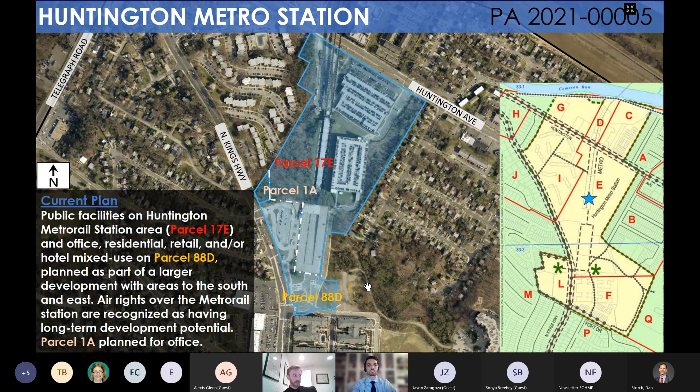And so that, as well as the south garage closing, has compelled a new look at the comprehensive plan for this specific study.

The Board of Supervisors authorized a plan amendment to look at the entirety of the Huntington Metrorail site and that adjacent parcel as a new planning study area, and asked staff to consider a maximum floor area ratio of 1.5 FAR, which is about 1.8 million square feet of primarily residential development. I'll explain in further detail exactly what that land use mix is that we've been looking at.

In any case, some of the development is anticipated to occur south of the station along North Kings Highway, and then some of it is anticipated to occur at a later phase on the Huntington Avenue frontage once that north garage reaches the end of its useful life.

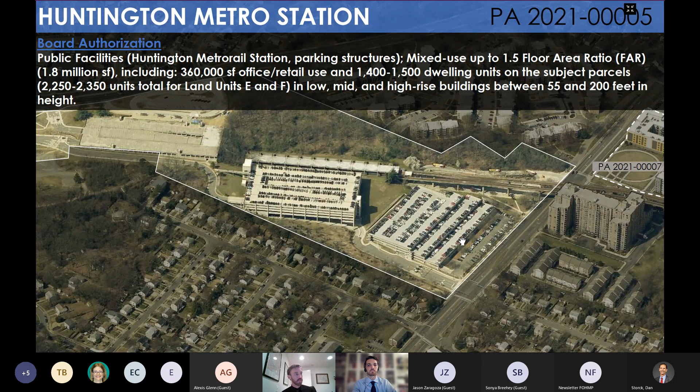So this is what we call the quantification of the plan amendment, looking at the total increase in development intensity and density associated with the plan amendment. In a nutshell, the net increase being requested with this planning study is up to a maximum of 1,500 net new multifamily units over the current plan recommendation. Additionally, 86,000 additional square feet of new office potential and 9,000 square feet of retail potential. These uses would be provided in low, mid, and high-rise building types between 55 feet and 200 feet. That's the maximum density scenario.

One of the things we'll say is when we do our impacts analysis across systems—transportation, environment, schools, parks, public facilities—that's what we study: this maximum scenario, to try to understand the potential impacts of a development of this scale.

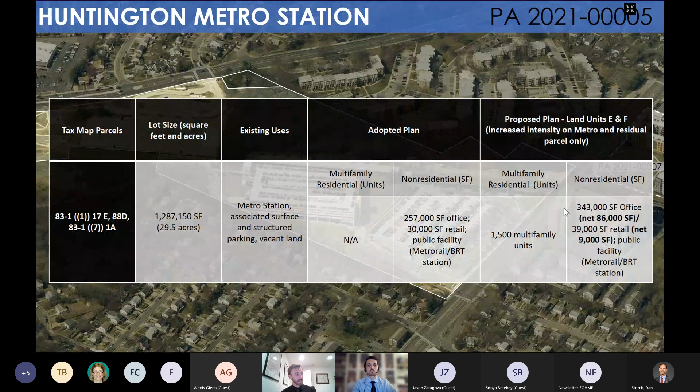I'll save the meat of the plan amendment, since the primary focus of this meeting is the active transportation planning effort. But if you're interested in the planning study underway, the task force that Supervisor Storck had take a look at this, known as the SSPA task force, produced recommendations on the planning study on July 11th.

Some of those recommendations resulted from this active transportation planning effort. As I mentioned, we've been able to front-load some of those recommendations into that task force draft as they relate to the frontages in particular.

So I'll give it away now: the plan amendment recommended by the task force includes a 10-foot wide shared use path with a minimum 8-foot wide landscape amenity panel with street trees along the North Kings Highway frontage, to accommodate pedestrians and cyclists of all ages and abilities. In addition, on the Huntington Avenue frontage there would be improved bicycle and pedestrian facilities with streetscape, which could be accomplished including through repurposing existing right-of-way inside the curb, such as the right turn lane along the site frontage.

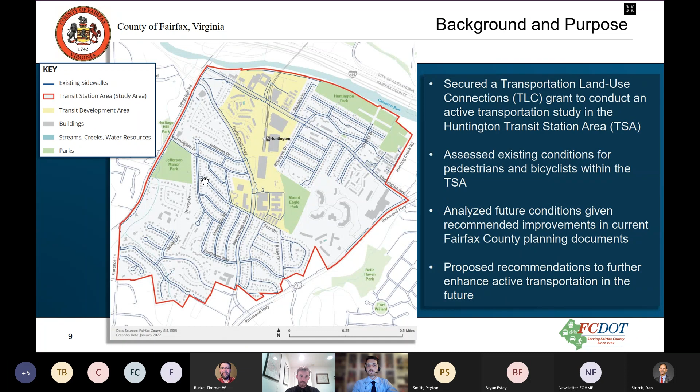So a bit more about the Transportation Planning Board, which is really the folks that organize and administer this grant. They're housed at the Metropolitan Washington Council of Governments, also known as COG. They've been administering this grant since 2007, and they've done 167 planning projects throughout the region, a really helpful way of coordinating transportation and land use connectivity in these focus areas where we're seeing transit-oriented development.

As part of this project, a consultant team was selected. Fehr & Peers was the lead project consultant, and they have a lot of experience. The county's worked with them in the past on similar projects focused on active transportation, and done a lot of work in metro stations around the region, as well as a subcontractor, Rhodeside and Harwell, who assisted with data collection and review of planning documents. And of course we had Fairfax County Department of Transportation staff, as well as the planning department and other departments that helped flesh this report out and made this study worthwhile.

So how is this different from other transportation studies? If you're familiar with the plan amendment study, for example, or any other transportation studies throughout the county, a lot of the metrics are focused on how we can improve traffic, vehicular traffic, how we can improve delay, how we can improve level of service for vehicles. So really we wanted to focus on metrics that would look at how we improve comfort, safety, and access for pedestrians and cyclists.

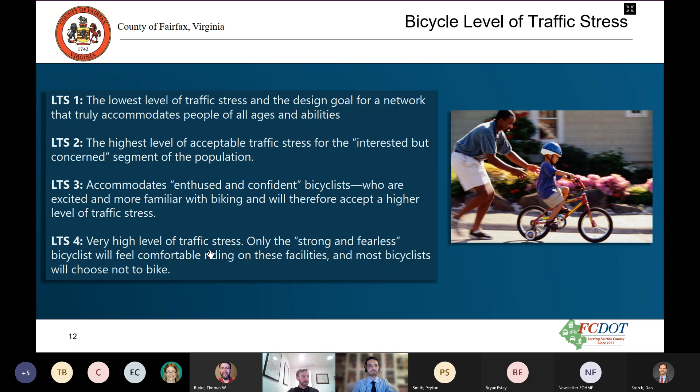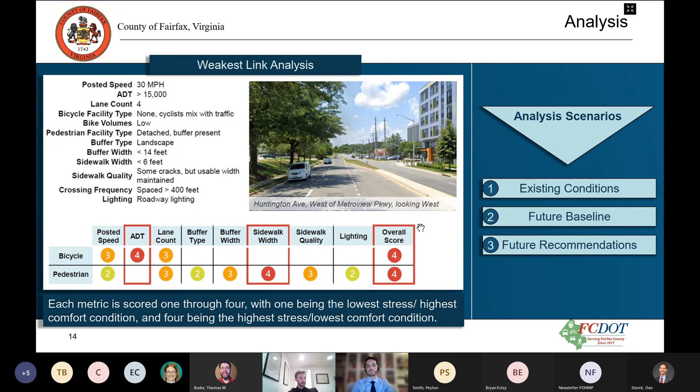And then we went a step further and said, okay, our goal here is to get to a level of comfort of 2 and a level of traffic stress of 2. So how can we achieve that? And what recommendations do we need to put forward in order to achieve that level?

Another component of the study was pedestrian crossings. That's obviously very important when you have these major roadways, these minor arterials - Telegraph Road, Kings Highway, Huntington Avenue - it's actually finding a place where you can cross safely. So Fehr and Peers and RHI did a walk and validated the different crossings around the TSA to see how well spaced they are, and also where certain crossings are missing.

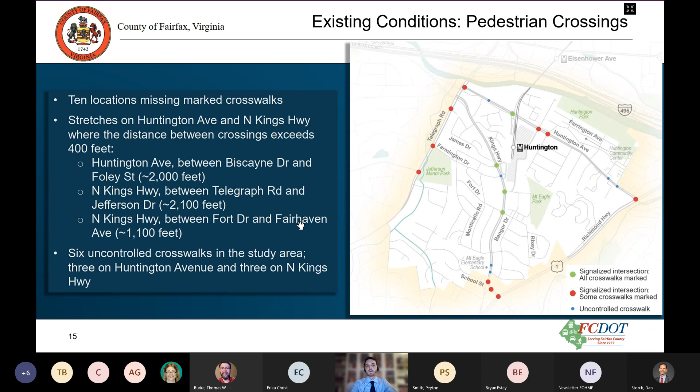Huntington Avenue between Biscayne Drive and Foley Street, you have approximately 2,000 feet of space between those crossings, and on down the list here. So part of the study was to look at ways at which we can minimize those crossing distances, or distances between crossings, I should say.

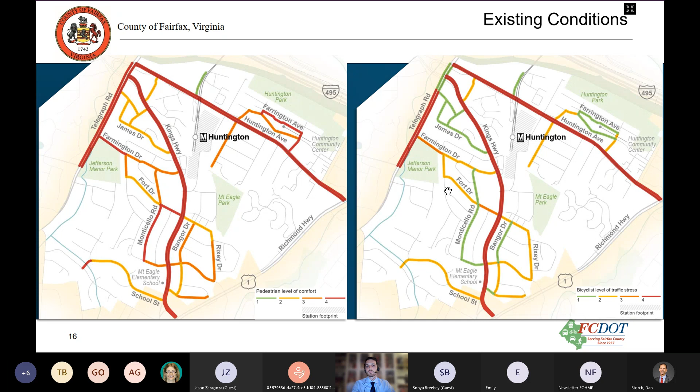Obviously, if you're from the Jefferson Manor community, you know that there have been some recent improvements to the sidewalk infrastructure here, especially along Edge Hill and other streets in that community, which are not included in the assessment. Still want to take credit for those.

So again, this is looking into the future baseline for pedestrian comfort, taking into consideration some of the recommendations that we have in the trails plan, the bike plan. And we also included some recommendations from the Jefferson Manor and the MVCCA resolution, North Kings Highway resolution, which looked at how to make pedestrian improvements along North Kings Highway.

That was one of the challenges we had in looking at the space on North Kings Highway, given the BRT system that's going to be using that stretch up into the metro station. And how do we work with that to provide more space and improve comfort for people walking along Kings Highway? But these were the recommendations that were considered to produce this result.

And again, not great. I mean, there's certainly areas you could see that we would want to improve, given the scale on the bottom right, showing the level of comfort here. I will note, of course, none of these improvements are funded, and any design, of course, would be subject to the expected impacts, the costs. Again, we have to consider context here and how these recommendations could actually be implemented. This is just a study to see what could be possible to improve infrastructure here.

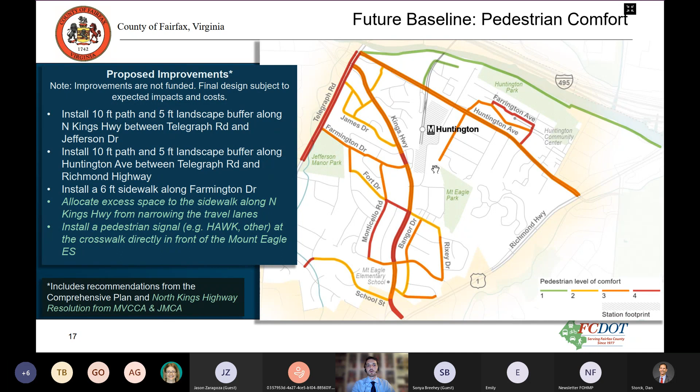But things do get better for bicycle level of traffic stress, given the baseline considerations, and in large part that's due to taking the cyclist off the roadway. So certainly for Huntington Avenue, if the cyclist is able to use a shared use path along the entirety from Richmond Highway to Telegraph Road, that's going to be a much more comfortable situation than riding in mixed traffic. So you see a lot more improvement from the bicyclist standpoint than you do for the pedestrian.

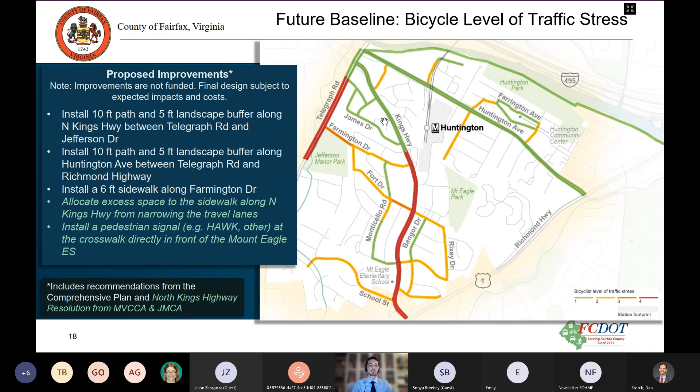So going beyond that, one concept that we had looked at, and some of you may be familiar with, is the concept of a road diet. Essentially, as you can see in the picture, what that does is you're taking away space from the vehicle and then repurposing that for other uses. So you can see here you have some on-street parking with some street trees with the curb bumping out here.

You also have dedicated bicycle lanes. You've removed the travel lanes, you're down to one in this situation. You have a dedicated transit lane. You have some streeteries, as you might call them here, some other uses that take advantage of that extra space. So that's an extreme example.

Typically in the county, what we're looking at is a 4-lane roadway, 2 travel lanes in each direction, and you reduce that down to a 3-lane roadway, with 1 travel lane in each direction and then a center turn lane that you can use for left turns.

So we've thought that Huntington Avenue might be a good candidate for a road diet. Again, that would be removing 1 through lane in each direction between Telegraph Road and Richmond Highway, and then providing accommodations for cyclists and a wider sidewalk. So that is one thing that was included in the recommendations that we'll show on the next slide.

But given this, I just want to throw the disclaimer out there that this would need further study if this is something that the county would pursue as an improvement. Traffic analysis certainly would need to be more in depth than what we used for this study to see what the impacts are, but something that could be possible in the future.

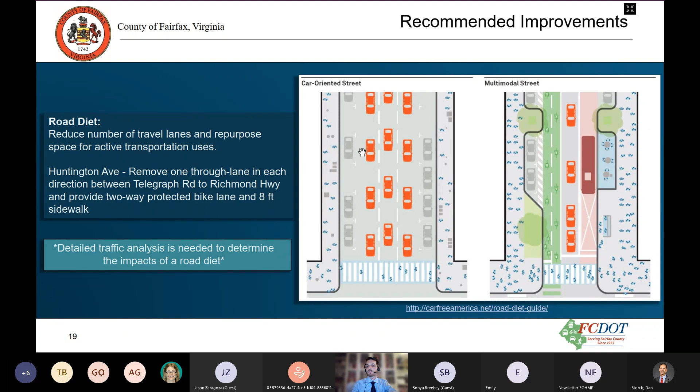So another busy map, but this is kind of all the recommendations that we've come up with in going beyond that baseline recommendation. So again, trying to accommodate cyclists off street on Telegraph Road as well, on North Kings Highway.

And you'll notice that some of these recommendations aren't just improving the quality of the sidewalk or widening the sidewalk, but also potentially reducing the speed. And again, another disclaimer, obviously any reduction to speed, any adjustment to the vehicular lanes and the space along the roadway would be subject to coordination with VDOT. So that kind of goes without saying, but just wanted to make that disclaimer here.

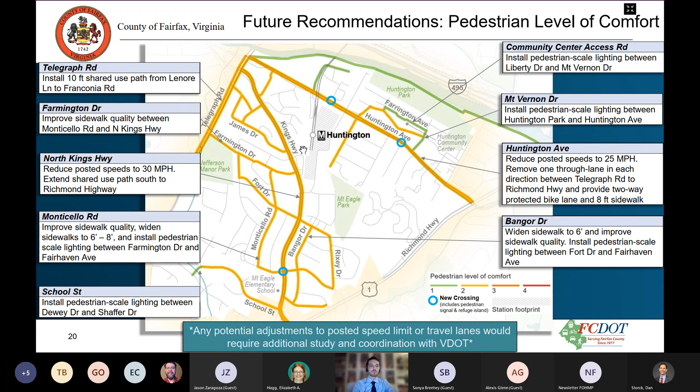But obviously slower speeds would help comfort and would help cyclists on the road. So you can see a whole number of things that get us to pedestrian level of comfort 2 for the entire TSA. There's other areas that even go beyond that. Pedestrian scale lighting is a big one too - we have a lot of areas around the TSA that are not well lit. Doing simple things like adding pedestrian scale lighting and some small sidewalk maintenance projects could help comfort as well.

An even better situation is expected for bicycle level traffic stress. You're taking cyclists off the road in many of these cases, creating separation from traffic. You have all the recommendations that went along with the pedestrian map, reducing vehicular speeds on Huntington Avenue and North Kings Highway. Those would obviously help reduce traffic stress and improve comfort.

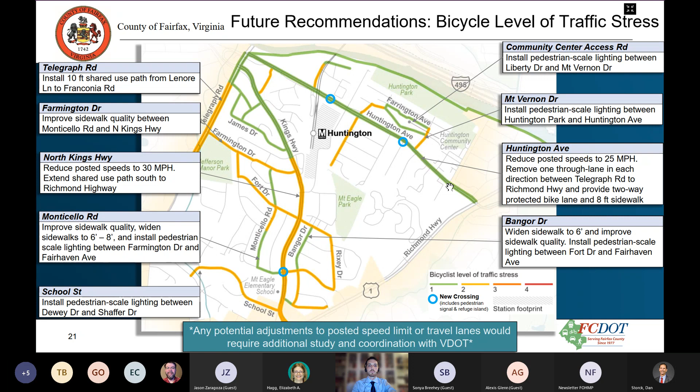So that's a big list of recommendations that would obviously cost a lot of money and a lot of time. I don't want to get people's hopes up that this is all going to get done, and get done now. This study was really to step back and look at the transit station area to see where we can make the biggest bang for our buck improvements. It seems really that Huntington Avenue and North Kings are the focus, where we can make big strides in connectivity by following through with some of these recommendations.

If you want more information on the study, we have the report published online. As Graham noted, we consider a lot of these, at least along North Kings Highway and Huntington Avenue, as part of the Metro Plan Amendment. We've also added a recommendation to increase connectivity across Huntington Avenue - a mid-block crossing just north of the station to improve access to the Cameron Run Trail. That was another major recommendation that went into the plan amendment.

As Graham noted, the Planning Commission hearing for the Metrorail Plan Amendment is on October 19th, and the Board of Supervisors hearing is scheduled for December 6th.

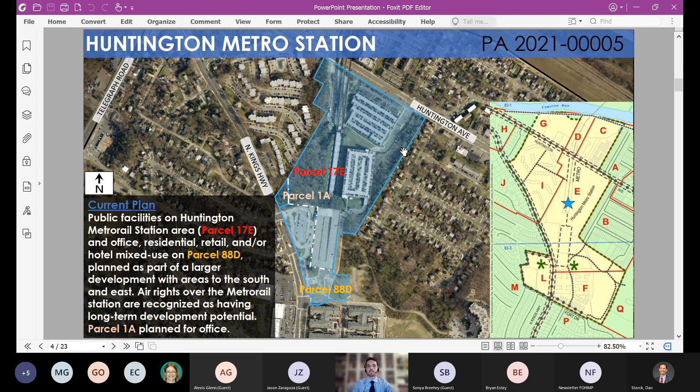So the plan amendment is really this section—actually, this is probably a better map. The plan amendment really is here, this blue shaded area. This study, the Huntington Active Transportation Study, is considering beyond that, the wider area outlined in red here.

So that's what the plan amendment is addressing. Because we were at the request of some of our ownership, our various owners within the community, we are exploring the opportunity to sell our entire complex.

So I just wanted to make sure, because that density cap applied to just our plot would be really bad, but because it's really not affecting us, that's not a problem. Gotcha, right, gotcha, all right. Thank you very much. Sure, thank you.

Looks like we have Jason up next. Go ahead, Jason. Hey Tim, thanks for this, I just had a question. When the slide showed the timeline for this, it looked like the final recommendations would come through at the end of 2023, which would mean any kind of implementation probably wouldn't take place until 2024 at the earliest.

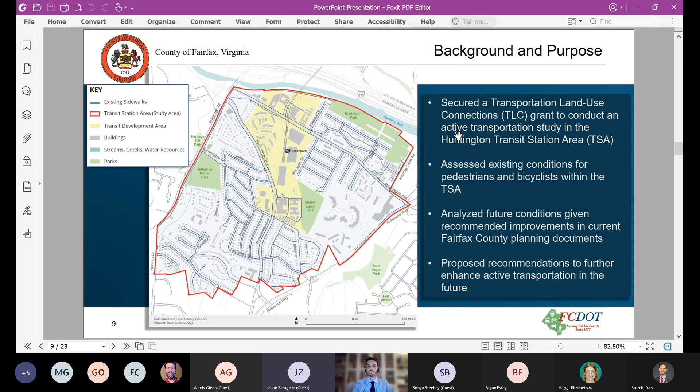And I guess my question is, do all improvements on, say, Huntington and Kings Highway have to be part of this process? The reason I ask is that one constant thing that comes up in the Huntington Community Association meeting is the intersection at Huntington and Hunting Creek, where you can go from the shopping center by Richmond Highway over to the Riverside towers. There are pedestrians running across there all the time outside of a crosswalk—it's basically a 5-way intersection with cars turning left both directions, and it's extremely dangerous today.

So I guess my question is, is there any type of process to review things like that now, or does this all have to be part of this process, which means we'd basically be looking at 2024 at the earliest for something to change there?

Sure, so I'll take a step back—this is a lot of information in one presentation. We're actually talking about 3 different plans in this one presentation. Graham talked about the plan amendment, which is focused on the Huntington Metrorail. This study, the subject of tonight, is the active transportation study, which looks at the TSA. And then this timeline is for the Active Fairfax Transportation Plan, the countywide plan—the much larger study.

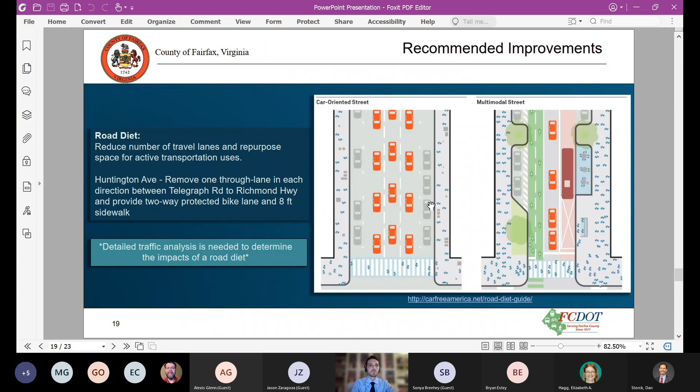All right, well we do have a pretty small group tonight, so if there are no more questions, I suppose we can end a little early. Last call if anybody has questions or comments.